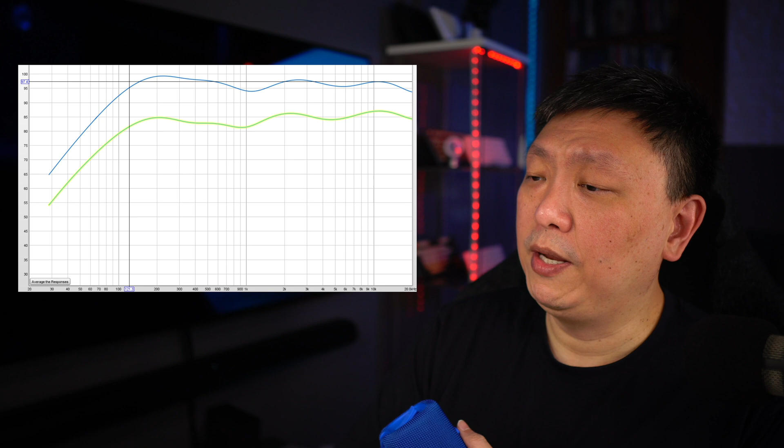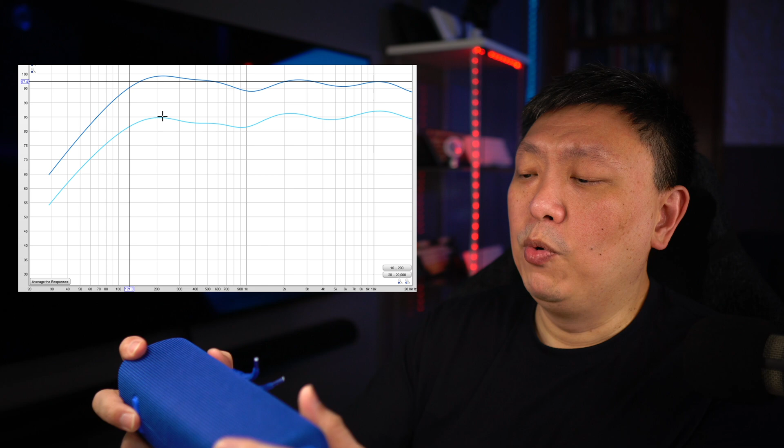Let's try this. There are two curves loaded here. On the left you see the starting point of 20 hertz, the very deep bass region, all the way up to 20 kilohertz on the right. The light blue curve, which I'm highlighting in green now, represents the frequency response of the Xiaomi portable Bluetooth speaker, 16 watts - I'll just call it the Xiaomi speaker - at 50% volume. This is the frequency response at 50% volume, hitting a peak of 85 decibels. Again, I'm measuring about 8 to 10 inches away from the speaker, so this is not normalized - it's just the kind of loudness you'd hear if you were 8 to 10 inches away. At this point, around 200 hertz, it is picking up.

From 200 hertz and below, the bass will keep falling off.

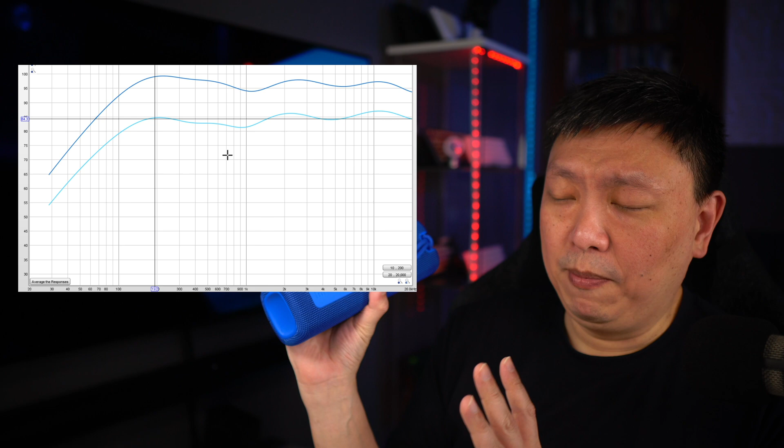So in a way, I would tell you that this guy is not a bass monster, right? But it does get loud. And how loud does it get? It actually carries it all the way through to 20 kilohertz very, very well. So I was actually quite surprised at the frequency response of this.

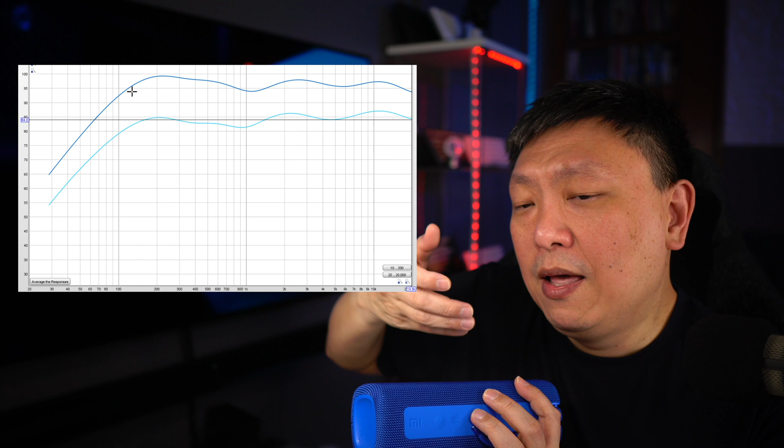Now, the light blue curve is 50% volume. So what happens when you jack up the volume to 100%? In a lot of modern speakers, especially the smaller speakers, when you jack up the volume, because the drivers are so small, the DSP actually pulls down some of the frequencies, especially in the bass region. Anything below 100 or 200 hertz, they will start tailing it off because the amps just don't have enough power and the drivers are simply too small to replicate those kinds of frequencies at that kind of amplitude, because that would mean the drivers need to move a lot more. And at that size, can you imagine how big the drivers are going to be?

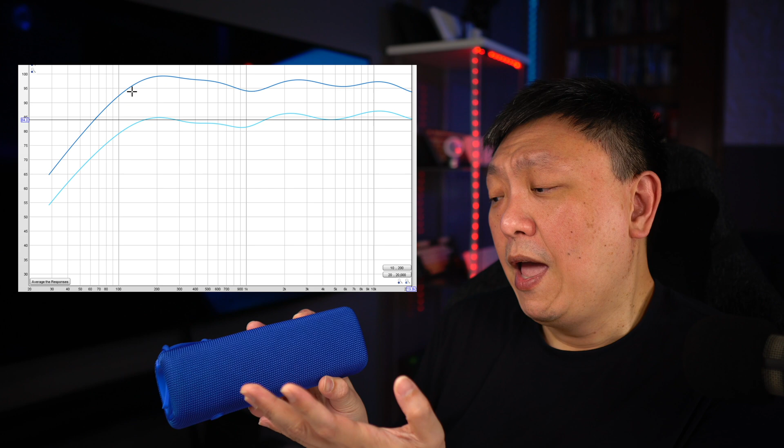It's probably just going to be about this size, right? There are two drivers here. And you simply won't be able to get that kind of volume. But in this particular case, if you look at the 100% volume output curve, there is actually very little change in the sound profile. There's a little bit of tempering off of this bass curve below, say, about 100 hertz or so, but otherwise, the increment is actually pretty even throughout. So they did a little bit of pulling back in terms of the bass response from below 100 hertz, but otherwise, the sound profile looks pretty consistent, which is a good thing.

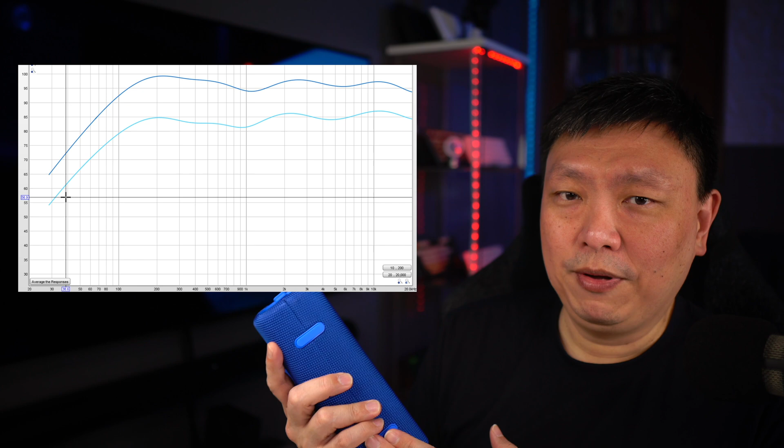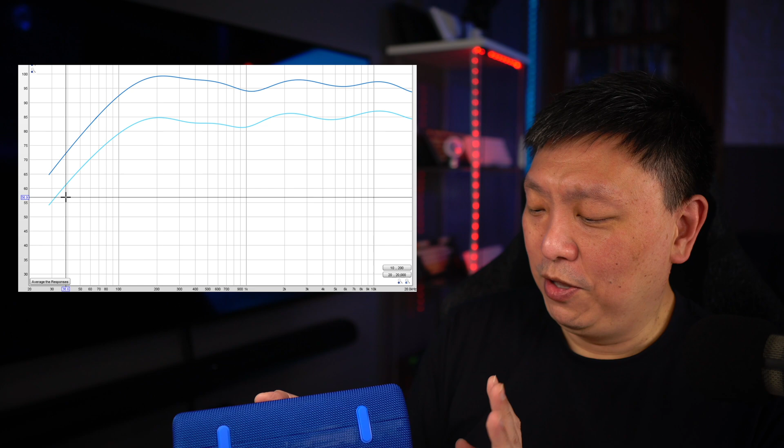Meaning to say, they are actually putting the 16 watts to quite good use. If you hear the music coming from this guy, I have to get you guys—I mean, I don't want to record it or record anything now because it's quite late at night. But anyway, just trust me, you will actually get quite loud sounds from this speaker.

Now, for comparison's sake, I'm going to pull in the JBL speakers, okay? And again, I'm not pulling in curves from previous tests because different days, different setup, different distances—I just don't want to confuse things. So I did a fresh frequency sweep for the JBL Flip 5. Let me just compare both the 50% curves. I'm going to take away the Xiaomi portable speaker 100% and pull in the light red curve. This is the JBL Flip 5. Red line for the red speaker, blue line for the blue speaker.

If you allow me, I'm just going to give you a very quick primer on what this is. Anything that is below 200 hertz, you will hear that as bass, and anything that's between 200 hertz to 800 hertz, that's the human vocal range. Some of the sopranos will go higher, some of the female voices will go a little bit higher, but in general, once you go past 3,000-4,000 hertz, 3 or 4 kilohertz, you are mostly listening to treble.

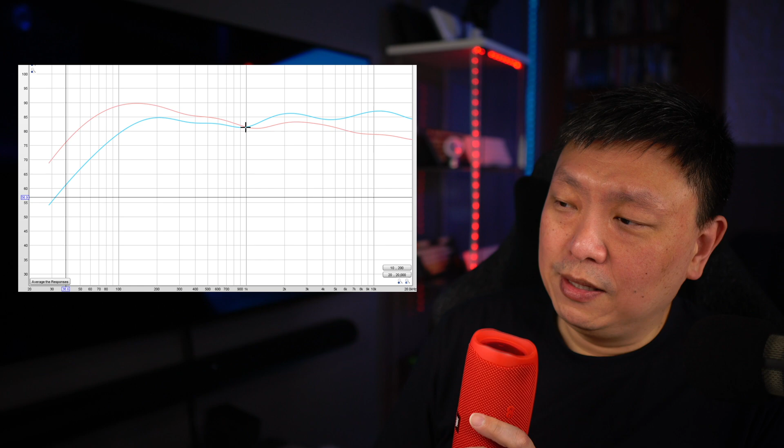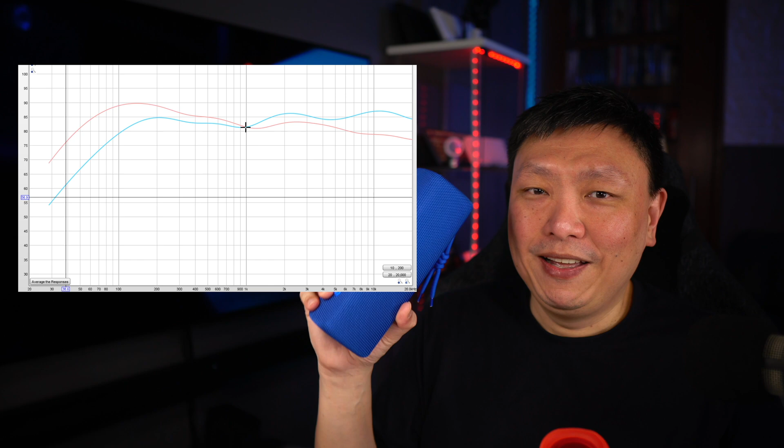Now, if you look at this red curve here, the JBL, you will notice one thing: the bass is actually a lot more pronounced. The vocal range is also a lot more pronounced than the Xiaomi speaker here. But at a certain point, right about almost 1 kilohertz—well, at the 1 kilohertz test tone—the Xiaomi actually starts performing a lot louder. So at 50% volume, mind you, the bass coming out from the JBL is tremendous, a lot louder than the bass coming out from the Xiaomi speaker. But past 1 kilohertz, the Xiaomi speaker shines right through.

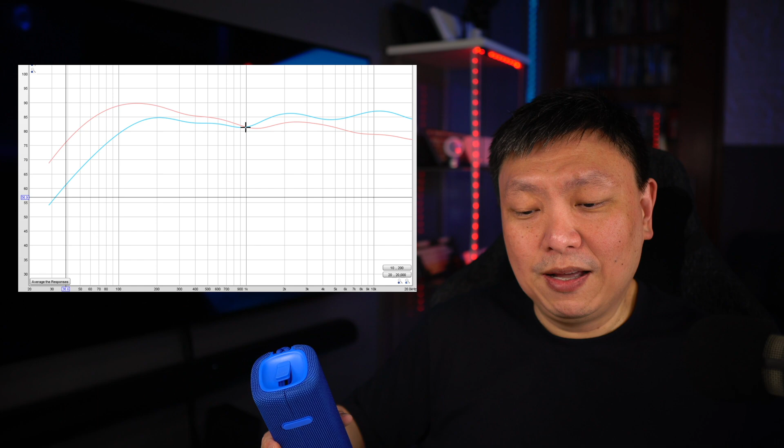So in terms of overall volume, at a slightly further distance, you will get the impression that at 50% volume, this Xiaomi is sounding louder.

You tend to hear more treble at a slightly longer distance, whereas for bass, the energy you feel actually falls off quite quickly with distance. So if you're putting it next to you at this distance, the bass can really be heard on this guy. But in a party situation, by the pool, or a backyard barbecue where you have a group, this is going to sound louder at 50%.

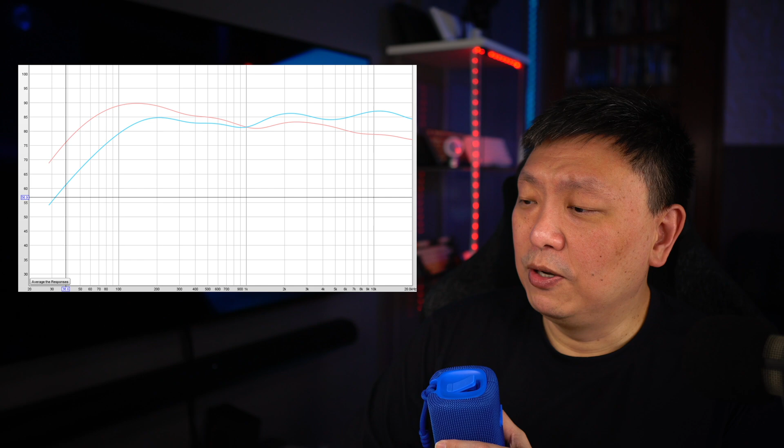Now we have the 100% curve, so let's pull that up. This is the 100% curve for the Mi Portable, which we saw earlier, and this is the 100% curve for the JBL Portable. If you look at the JBL Flip 5 at 100%, the gap is actually a lot closer to the Mi speaker. Overall, at 100%, across most of the frequency range, it's actually sounding louder than the Xiaomi speaker. But you have to bear in mind, you're possibly going to pay 2 or 3 times the price of this guy.

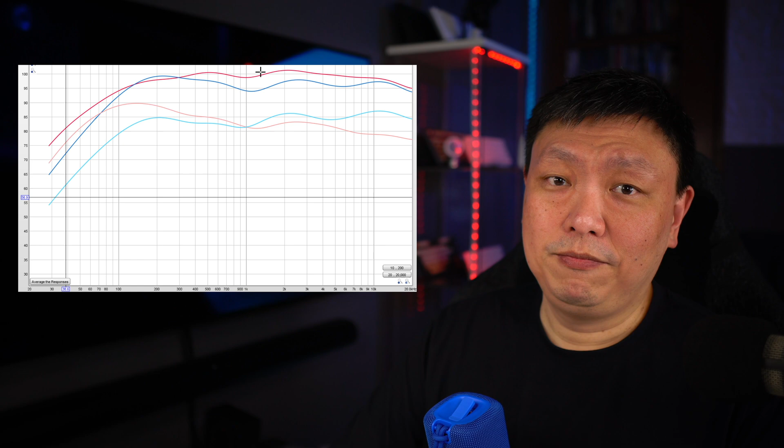And if you're going to pay that kind of price for one of these speakers, you might do well to buy a pair of these instead. A pair playing at the same time will definitely drive the blue curve above the red curve. Not only that, you get more separation, an even coverage of bass, and the soundstage will open up tremendously. Not to mention, you still have the line in - this one doesn't have a line in.

If you recall what I was talking about, when you increase the volume for small speakers, the DSP tries to pull back. To make it clear, I'm going to remove the curve for the Xiaomi Portable. This is the JBL. At 50%, which is the light red curve here, you'll see it's emphasizing the bass quite a bit. But when you hit 100%, the sound profile changes completely - the curve looks completely different.

They can still boost up the treble quite a bit, and the mid-range quite a bit too. But once it hits the bass portion, it actually cannot increase by the same amount as it can increase the mid-range and the treble. So overall, when you increase the volume from 50% to 100%, it actually starts to sound different already. The bass is still there, still louder, but it's just not keeping up with the rest of the frequency response range.

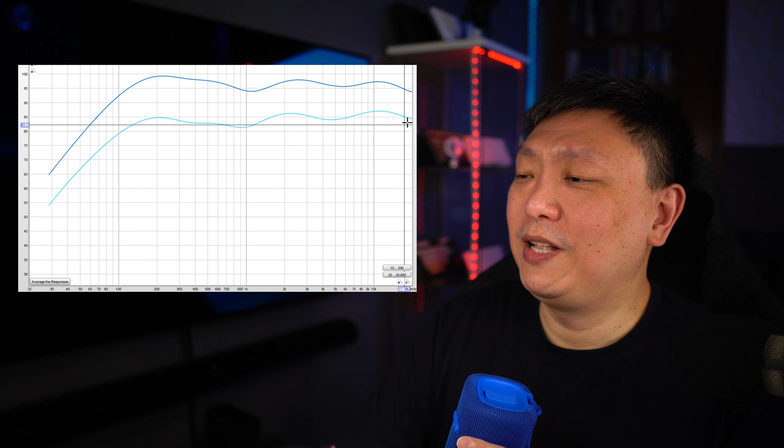What that means is that when you're listening to this speaker at different volumes, it's going to sound like a slightly different speaker. This is as opposed to the Xiaomi Portable, which I'll pull up here - the sound profile is actually pretty similar. Not exactly the same, but for most parts of it, it stays consistent. Only the bass region tails off a bit at the full 100% volume.

In summary, I think this is a great small speaker. In recent years, all these small speakers have gained so much in quality, and the sound coming out of them just sounds unbelievable already. I think the trend was, well, not started, but really pinnacled at the Devialet Reactor - there was a 600 watt and 900 watt version, and the sound coming from something that size amazes me. So I've been looking at these kind of small portable speakers, which are battery driven. Can you imagine all this sound coming from battery power?

You can bring them out to the pool, when you're traveling, out to the picnic, to the park - wherever you go, you'll be able to get very, very decent sound coming from these speakers.